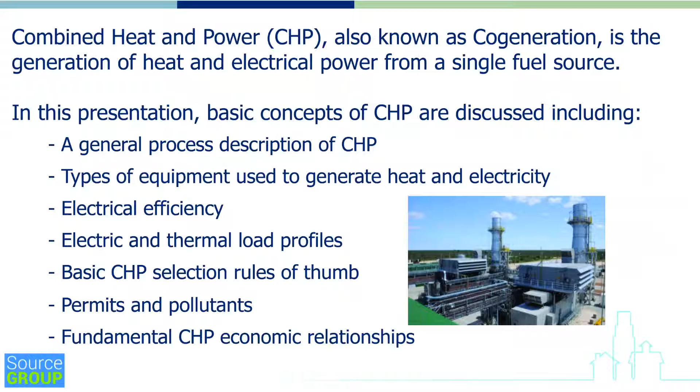In this presentation, basic concepts of CHP are discussed, which include a general process description of combined heat and power, the types of equipment that are used to generate heat and electricity, electrical efficiency, electric and thermal load profiles, basic CHP selection rules of thumb, permits and pollutants, and lastly, fundamental CHP economic relationships.

The general process of combined heat and power converts fuel into electricity. Then thermal energy from the generation process is recovered, and that heat is used to heat buildings and, through the use of a device such as an absorption chiller, also cool the buildings.

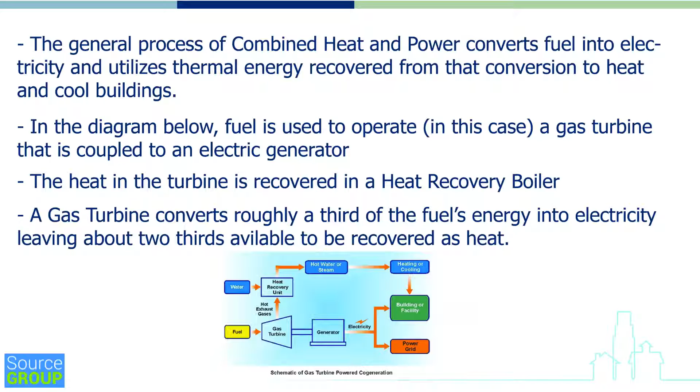In the diagram below, fuel is used to operate, in this case, a gas turbine that's coupled to an electric generator. The heat in the turbine exhaust is recovered in a heat recovery boiler. That generates either steam or hot water, and that is transferred or piped to the building where it's used to cool the building or heat the building, and also in cases of cooling, it's used for reheat purposes during the summer months.

Electricity for cogeneration is produced using various types of equipment. Gas turbines, which are very frequently used, are a piece of turbo equipment that is also an internal engine, and it's to be differentiated from a steam turbine, which runs on steam alone. Also used are reciprocating engines. These are engines that can be small or large, very similar to a car engine.

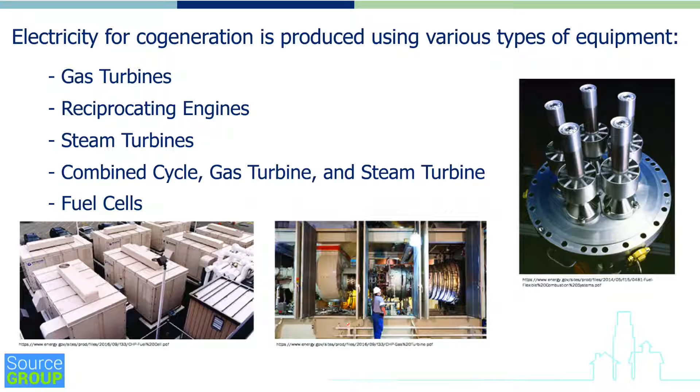Steam turbines, which take high-pressure, superheated steam. It has to be superheated in order to remove moisture so that the water droplets don't corrode away the turbine blades. Combined cycle, which is a gas turbine that's used along with a steam turbine. The gas turbine exhausts, recovers heat, which generates steam, and the steam is then used to drive a steam turbine. And fuel cells.

Electrical efficiency. Electrical efficiency is the ratio of electrical energy that's generated, that's the output, to the fuel's energy input. The amount of energy that's contained in the fuel is the input, and the output is the electrical energy. The electrical efficiency, expressed as a percentage, indicates the percentage of the fuel's chemical energy, in other words, the heat value of the fuel, that's recovered into electricity.

For example, the heat value of natural gas, which is a frequently used fuel, also known as methane, or largely methane, is 1,020 BTUs per 100 cubic feet. That's typical. It may vary, but that is a general rule, a conversion factor that's used. Also, in the case of number 2 fuel oil, or D2 spec diesel, a nominal value of 138,500 BTUs per gallon is used.

The electrical efficiencies listed below are rough percentages. The actual percentages vary by the type of machine and the complexity of the machine, the efficiency of the machine itself. A gas turbine has a nominal electrical efficiency of about 33%, or about a third. Reciprocating engines, gas engines, normally they run on natural gas, have an electrical efficiency around 40%. Fuel cells have an electrical efficiency of about 45%.

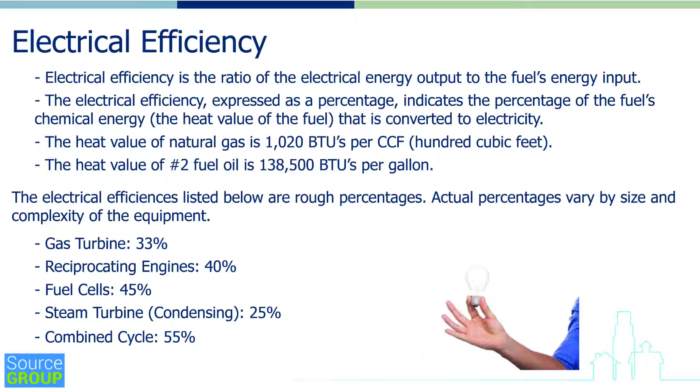Gas turbine. A gas turbine has an electrical efficiency, as we previously stated, around 33%. In the picture below, normally the electric generator would be coupled to the gas turbine at the shaft, and that's referred to as a genset. The compressor section raises the combustion air pressure from atmospheric pressure up to a compression ratio of about 10 to 1, so that would be 147 pounds per square inch.

Fuel is then injected into the combustion chamber and ignited. In order to inject the fuel into the combustion chamber, it must overcome the pressure of the combustion air, which at this point is 147, 150 pounds thereabouts. The gas pressure of the fuel has to be higher than that of the combustion section in order to get the fuel into the combustion section. The combustors in the turbine are sometimes referred to as combustion baskets or burner baskets. The turbine section converts the energy from the hot expanding gas in order to turn the shaft.

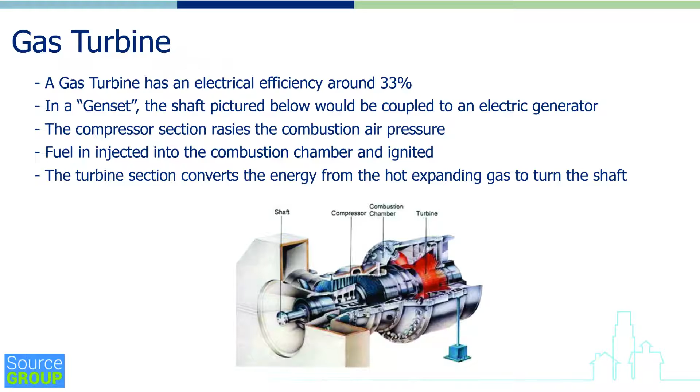The reciprocating engine. Reciprocating engines have an electrical efficiency of about 40%. They vary in size. They can be small, 100 horsepower and even smaller, to several thousand horsepower. The engine itself is similar in concept to an automobile or truck engine. It has pistons that go up and down or back and forth.

Heat can be recovered from the exhaust of the engine and also from the cooling system that cools the engine block. However, the exhaust temperature is generally much higher than that of the cooling water. The cooling water has a temperature somewhere in the range of probably 180 degrees.

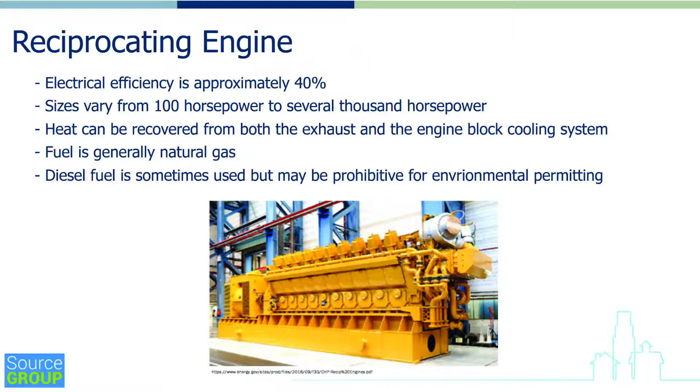So that can be used to generate domestic hot water in cases of buildings where they're close. 180 degrees can be used sometimes to heat the building. However, to drive an absorption chiller, 180 degrees is probably not sufficient temperature. The fuel used is generally natural gas. Diesel fuel can sometimes be used, but it may be prohibitive for environmental permitting reasons.

Steam turbine. Steam turbines have two basic types, a condensing turbine and also back pressure turbines. A condensing turbine, which has a higher electrical efficiency, has a heat exchanger that condenses the steam that's leaving the turbine. A back pressure turbine, also known sometimes as a topping turbine, has lower pressure steam that leaves the turbine.

Condensing turbines, as I stated earlier, have a higher electrical efficiency and can range anywhere from 20% for smaller turbines on up to 38% for very large, efficient turbines. Back pressure turbines, on the other hand, have a relatively low electrical efficiency and range somewhere between 7 to 20%. Steam turbine based plants are generally more expensive than gas turbine or reciprocating engine based plants.

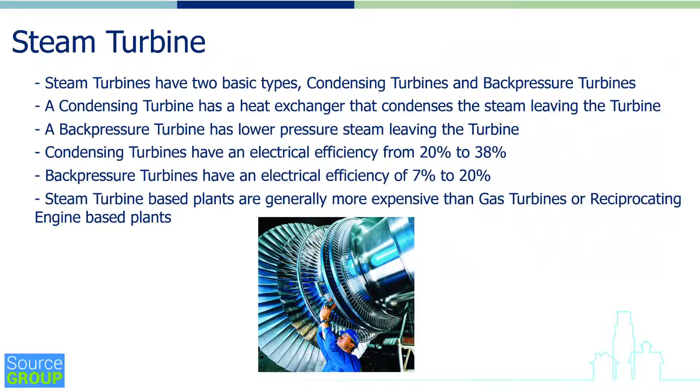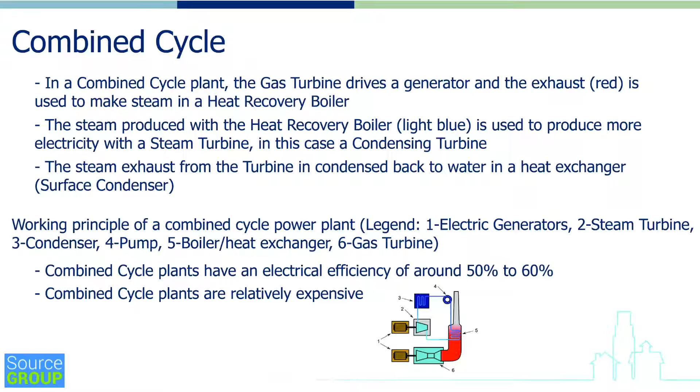The steam exhaust from the turbine is condensed back to water in a heat exchanger, generally called a surface condenser. Combined cycle plants have an electrical efficiency of around 50 to 60%. They are also relatively expensive.

The fuel cell. A fuel cell is an electrochemical device that converts fuel, again, the fuel of choice generally is natural gas, into electricity. Fuel cells are a relatively new technology with many evolving advancements. Fuel cells have an electrical efficiency of between 40 and 60%, depending on what type of fuel cell they are.

The phosphoric acid fuel cells, PAFC, comprise the largest segment of the existing CHP products worldwide and can provide electrical efficiencies around 45%. Molten carbonate fuel cells and solid oxide fuel cells are also used for combined heat and power and have a higher electrical efficiency, around 60%.

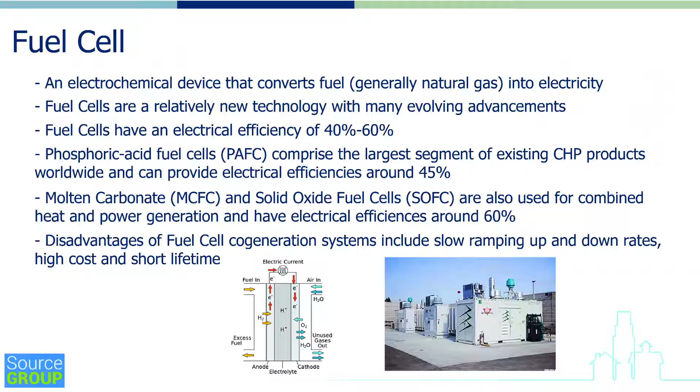Disadvantages of fuel cell cogeneration systems include slow ramping up and down rates. What that means is that if the electrical demand is going up and down and you want to follow it, the fuel cell may have trouble adjusting rapidly enough to meet those demands. And they are higher cost with a shorter lifetime.

Heat recovery boilers. Heat recovery boilers are covered here just so you get a sense of what device is used to recuperate the heat from the generation process. Boilers of this type can generate steam. Also, in some cases, they generate hot water, high temperature hot water in many cases, by extracting heat from the exhaust of a gas turbine or a reciprocating engine or even a fuel cell.

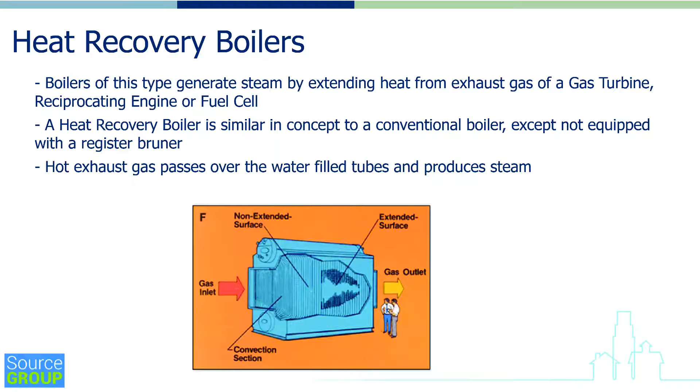The heat recovery boiler is similar in concept to a regular boiler, except that it's not equipped with a burner. Hot exhaust passes over water-filled tubes and it produces steam. Absorption chiller. Absorption chiller is included, again, to show how air conditioning can be made from heat. Seems counterintuitive to make chilled water from hot water, but that's exactly what it does.

The absorption cycle uses heat-driven concentration difference to move refrigerant vapors, usually water, from the evaporator to the condenser. The high concentration side of the cycle absorbs refrigerant vapors, thereby diluting the solution. Heat is then used to drive off these refrigerant vapors, increasing the concentration again. Lithium bromide is the most common absorbent used in commercial cooling, with water used as the refrigerant.

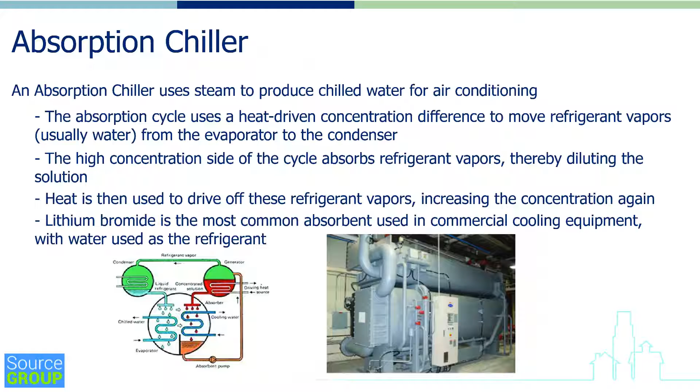Electric load profile. Electric load profiles for facilities to be powered from CHP plants are modeled from utility data on a daily, monthly, and annual basis. A rough approximation of a weekday profile of electric power consumption in a typical commercial building, depicted below, resembles a bell curve. The usage increases morning to afternoon and then decreases in the late afternoon. The lower curve depicts a weekend day.

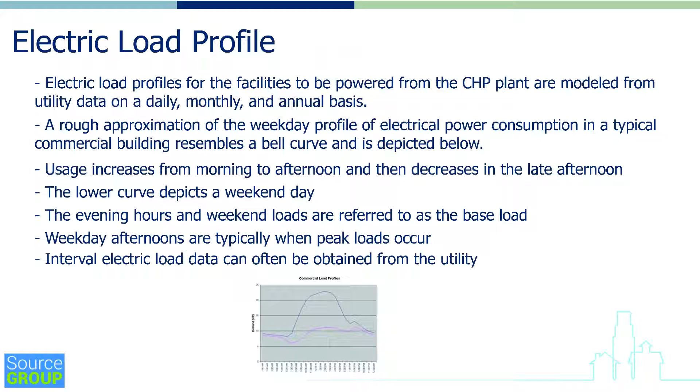The evening hours and weekend loads are referred to as the base load. Weekday afternoons are typically when peak loads occur. Interval electric load data can often be obtained from the utility. If the utility is contacted and you request it, many times, depending on the type of service you have, but certainly if you have HTS, in some cases LPL, large power lighting, the utility will actually furnish you interval data indicating what the electric load is at a given point in time during each day.

Thermal load profile. The thermal load profiles for the facilities to be served from the combined heat and power plant are also modeled on a daily, monthly, and annual basis from utility data. The utility data being, in most cases, a gas meter. If the buildings run on oil, then it would be meter readings during the course of the day that would indicate what the load profile is.

Some people would use steam charts to do that. However, it's probably not recommended because steam's very difficult to actually measure when there are variations in flow. So generally, for thermal load profiles, gas meter data is used, and that indicates how much gas is being used over an hour at a particular point in the day, and those vary, again, with time of day and the day of the week. The thermal load profile depicts demand over a period of time and the quantity of heating and cooling energy that must be added or removed from the building to keep people comfortable.

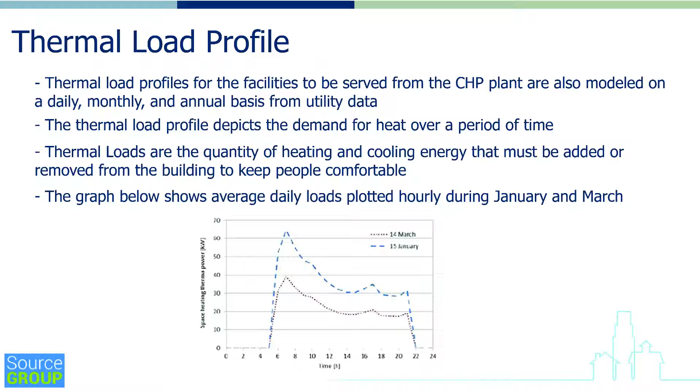The graph below shows average daily loads plotted hourly during the months of January and March. When selecting the type and size CHP plant, there are some rules of thumb that generally apply. The first one is that 3/4 of the available recovered heat should be utilized. Now that's always a challenge because what do you do with the heat during the shoulder months, during the spring and the fall? Generally, for the feasibility economics to work, you need to recuperate and use that heat close to 3/4 of the time. Now there may be exceptions to that.

Obviously, if there's a big spark spread between the price of natural gas and electricity, the economics can work with recovering very little heat. Over time, in general, however, it's better to utilize, both from an environmental standpoint and a financial standpoint, as much of that heat as you can. But there will be trade-offs there between generating electricity during peak periods and actually utilizing the heat that's generated. The sale back of electric power to the utility grid, that is the local distribution company, generally is not cost effective. They will pay something, but it's usually not enough to cover the cost of generating the electricity.

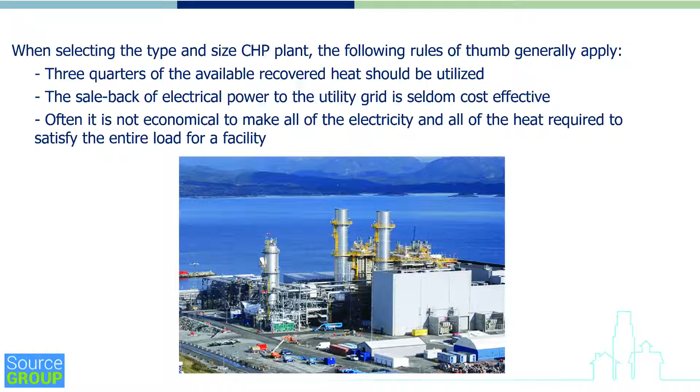Often, it's not economic to make all of the electricity or all of the heat required to satisfy the entire load of the facility. There are strategies such as electric load following, thermal load following, base load following, base thermal load following. There are different scenarios used operationally to blend the production of electricity and heat in the most cost-effective way.

Permits and pollutants. Air permits are generally required for a CHP plant. Small plants may have a very simple permitting process that just requires filling out some paperwork and having a fairly short approval time. Larger plants, however, can be quite complex. If the plant does not meet certain requirements, it can necessitate the need for a so-called PSD permit, Prevention of Significant Deterioration, which is a lengthy process and does take a considerable amount of time.

NOx, nitrogen oxides, and SOx, sulfur oxides, and particulates are regulated pollutants. Those are used in the permitting process, and the levels of those are generally incorporated into the permit conditions. Again, the permit itself can be complex. If the cogen operator is required to have a Title V permit, there are various reporting requirements. It has to be recorded every time the plant started up and shut down. The annual fuel usage has to be accurately reported every year, things like that.

CO2 is not a regulated pollutant, however. There's been legislative moves in the past to try to regulate it, but it's a very contentious subject, and so far, CO2 production has not been regulated. Although fuel cells don't emit NOx or SOx, they do emit CO2. So one of the advantages of fuel cells is that it's said they don't pollute, and that's true in the case of NOx and SOx. However, they still do emit carbon dioxide. CHP can reduce overall CO2 emissions if you take into account the displaced CO2 that's emitted by the utility during the generation process.